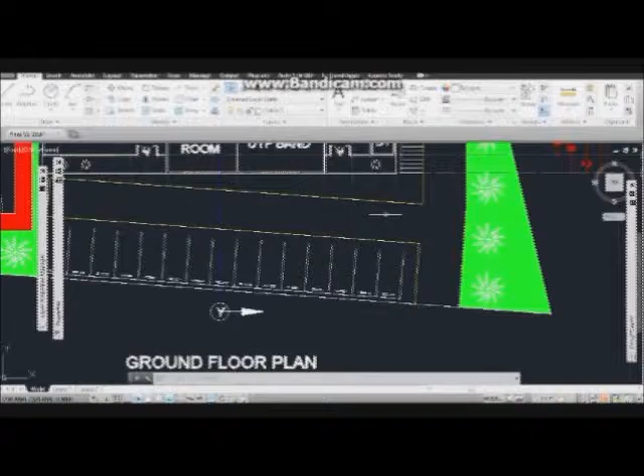Let us take a look at the ground floor plan. Basically here, we have 15 parking lots for cars, and we also have 20 parking lots for motorcycles.

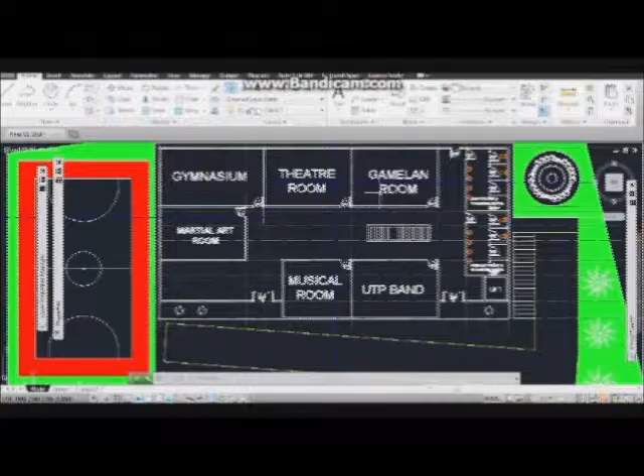For the ground floor, we have two main entrances to have access into our building, here and here. When you enter our building, you will notice that our stairs are built at the hallway of the building. We also have the gymnasium on the ground floor, the theatre room for the drama group to practice, the gamelan room for the Sangha Kirana group to have their gamelan practice, martial art room to provide for the sports of silat, taekwondo, aikido and muay thai.

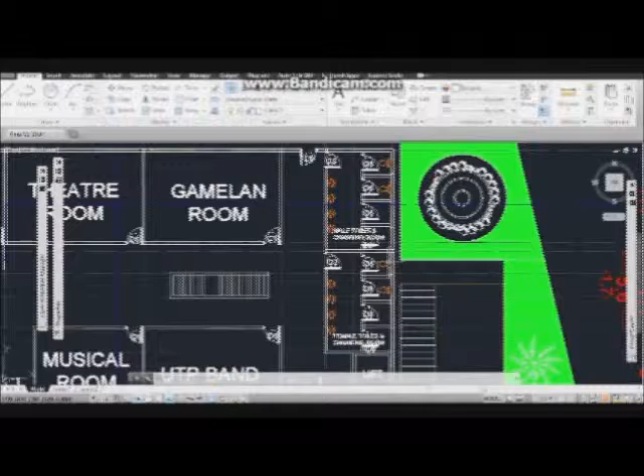We also have two rooms which are soundproof, the musical room and also UTP band. As for the toilets, we provided two toilets for male and female respectively. We also provide two changing rooms for male and female respectively too. And here we have the back entrance which is near to the toilet. For the disabled, we have provided a lift for their comfort. And not to forget, we also provide a mini futsal court right next to our building.

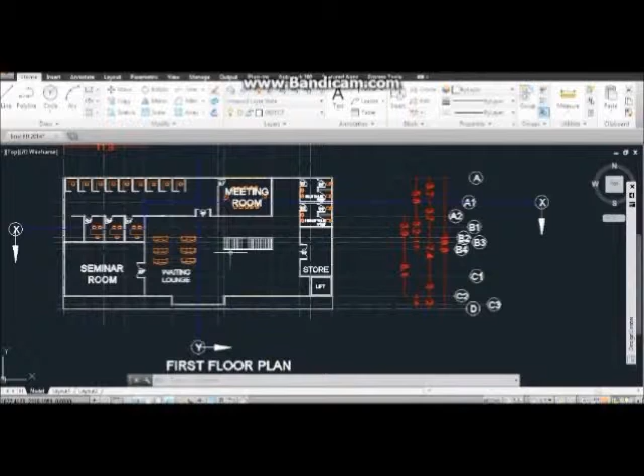Okay, now let's take a look at the first floor plan. You can see the stair bridge here. Right in front of the stair is the waiting lounge, and there are 3 couches. Also, we are going to place a reception counter here.

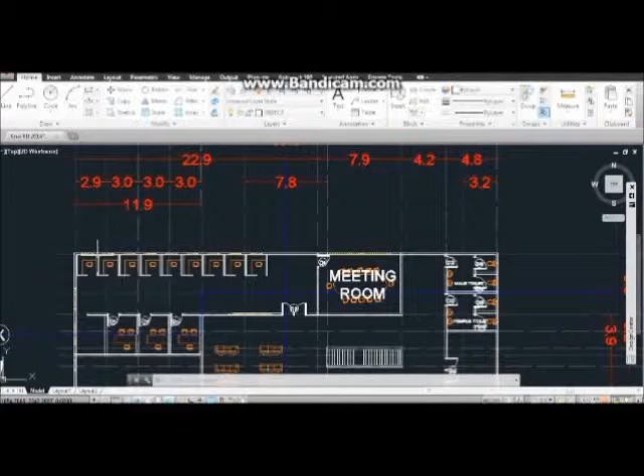From here, you can see this is the entrance of the administration section. Inside of the administration section, there are 9 cubicles provided for the curricular unit staff. In front of the cubicles, there are 3 rooms for the executive. Right next to the executive rooms is the pantry, which will be provided with furnitures.

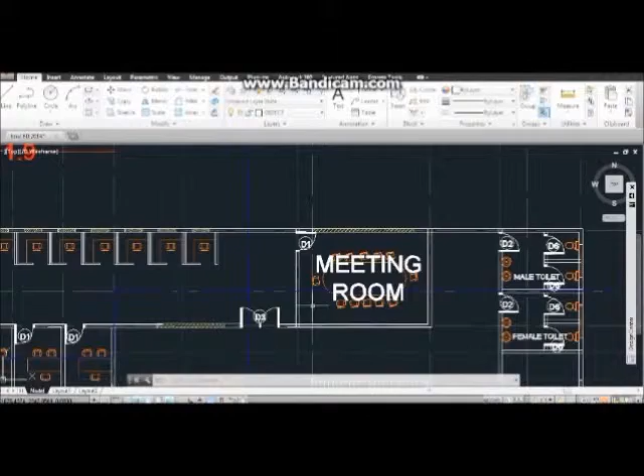At the end of the administration section is the meeting room here, and here will be provided tables and chairs. We also built a seminar room here. The seminar room will be used by the staff and student. Here is the entrance of the seminar room.

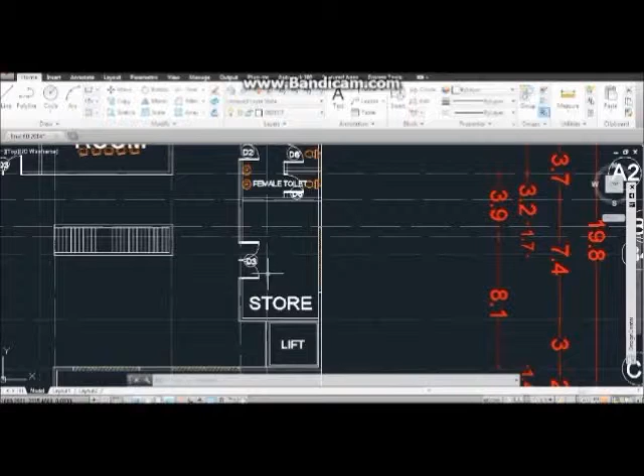Not to forget, we also built a store here. The store is used to store the files and equipment for the buildings. At the corner of the first floor plan, you have the toilet here, both for male and female. We provided 2 toilets and 1 sink here. And then at the other corner of the first floor plan is the lift for the disabled people's usage.

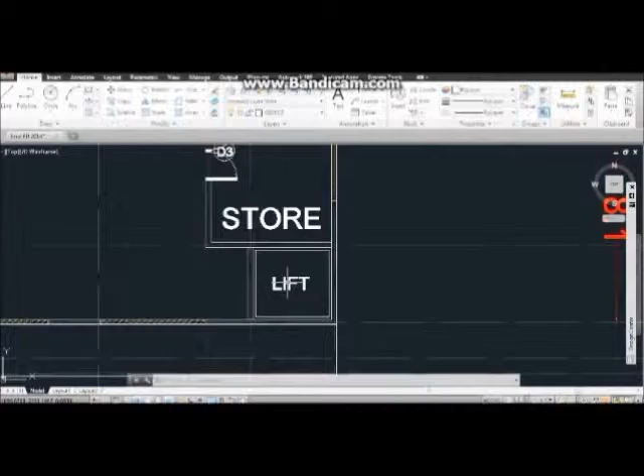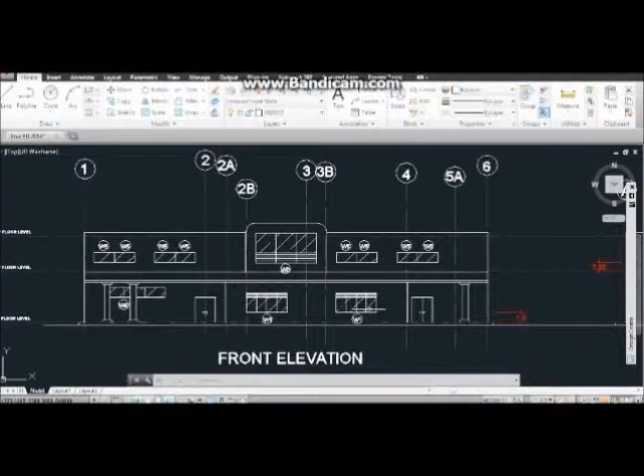This one is the elevations. There are 4 elevations: the front elevation, back elevation, right side elevation, and left side elevation. Firstly let's go to the front elevation. Mostly in the front elevation we can see doors and windows. The 2 main doors are actually made out of glass, and the windows are made from glass casement with ventilation panels on top.

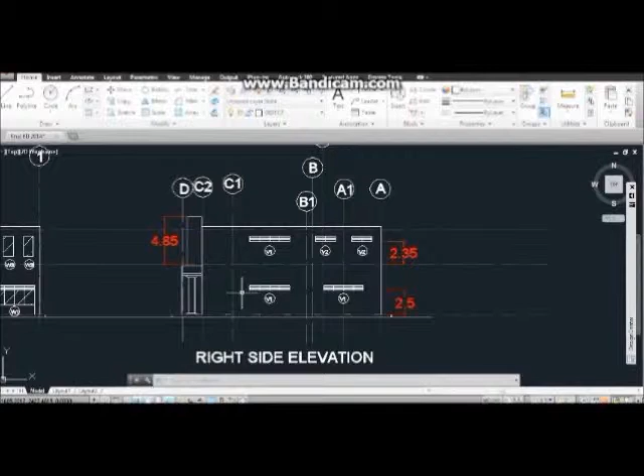Going to the back elevation, there are more windows, and here is the back door. As you can see in the right side elevation, there are no windows, but there are ventilation panels. This is because on the right side of the building, there are mostly toilets and stalls.

Next, the left side elevation. Here there are also more windows. The reason why there are so many windows in our building is because our building is aiming to be a green building. Therefore, if there are many windows, it will allow sunlight to fill in the building, thus using less electricity in the morning to light the building.

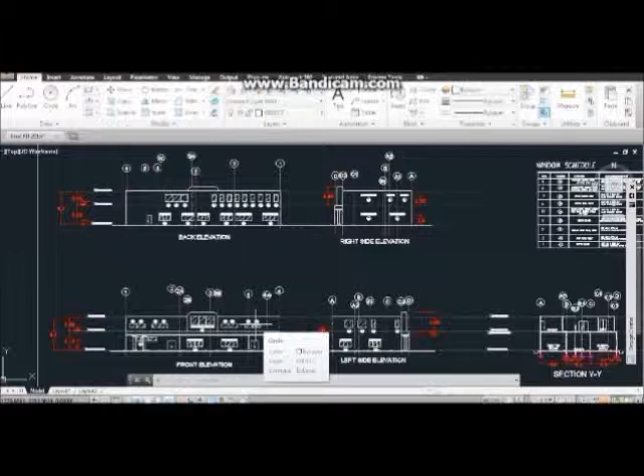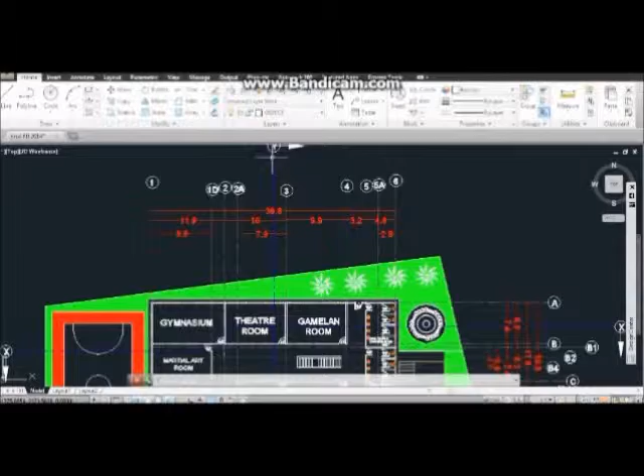Next, for the section YY, we take it from this point to this point. Let's take a look at section YY. For the ground floor we got theater room, stairs, and musical room. Next, for the first floor, office, and this is the door, and the lift for the disabled.

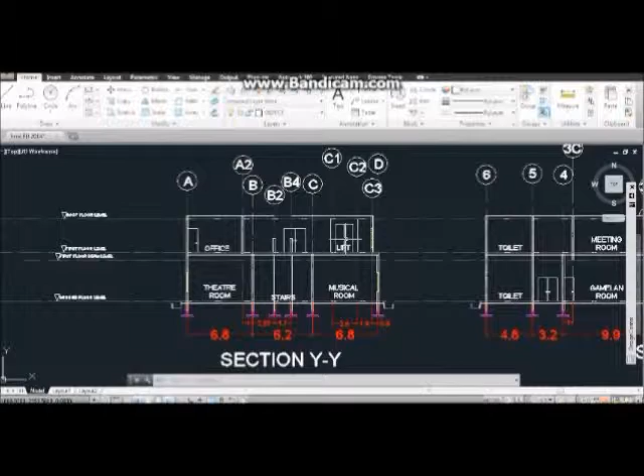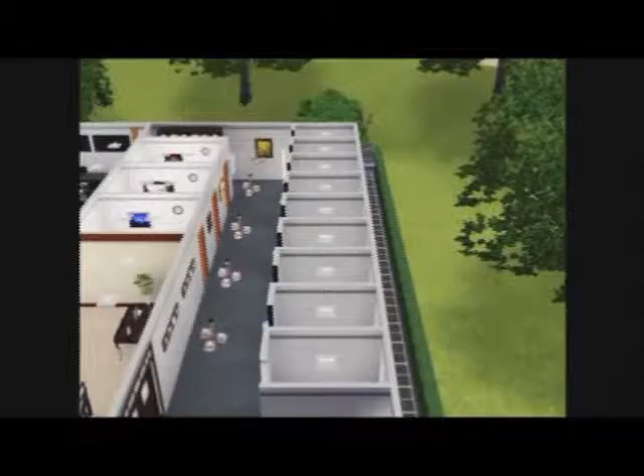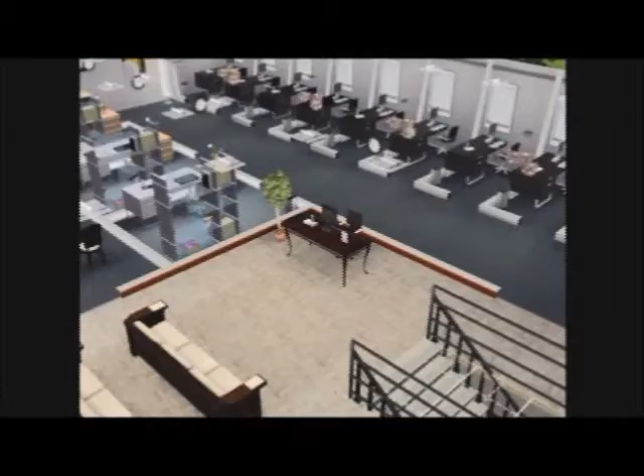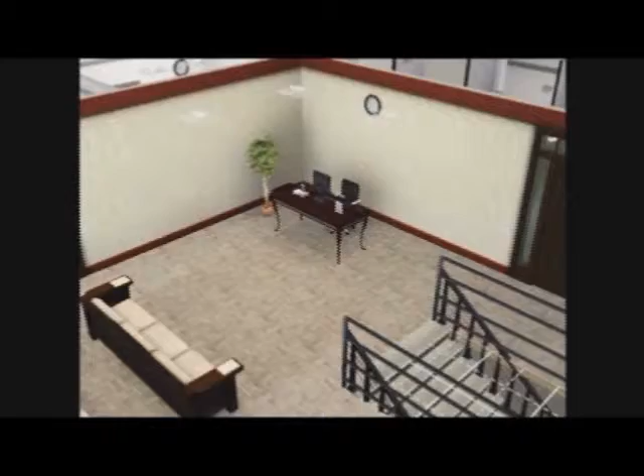And then there is the seminar room. There are chairs and a stage.

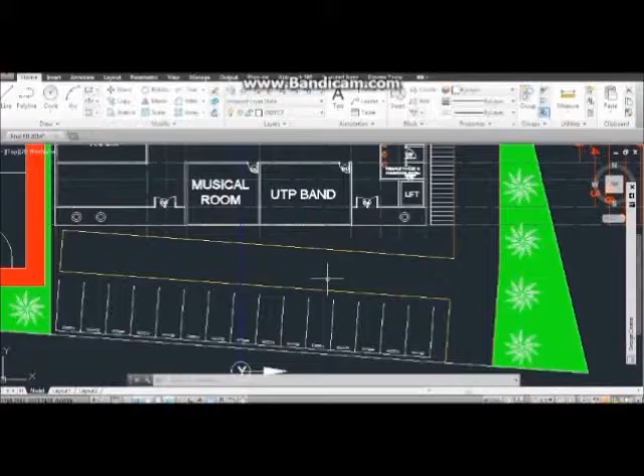In the event of emergency, students and staff will have to evacuate the co-curricular building and assemble at the assembly point for safety purposes. Last but not least, I can say that our building can be considered an outstanding building. This is because we are being very particular about the green building issues.

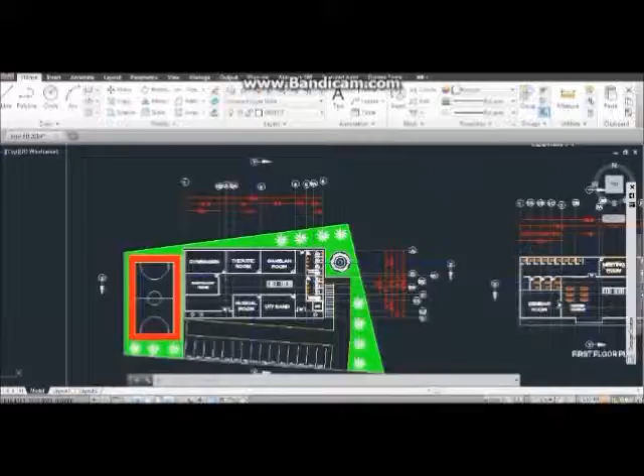As you can see here, we are planning to plant trees along this building and at the side of this building. We also plan to put well-trimmed bushes at the side of the building. Next, we also allocate a lot of windows here, as you can see from the elevations and also from the sections. This is because we want to allow a lot of light to enter our building, and therefore our building will be an eco-friendly building. Thank you.